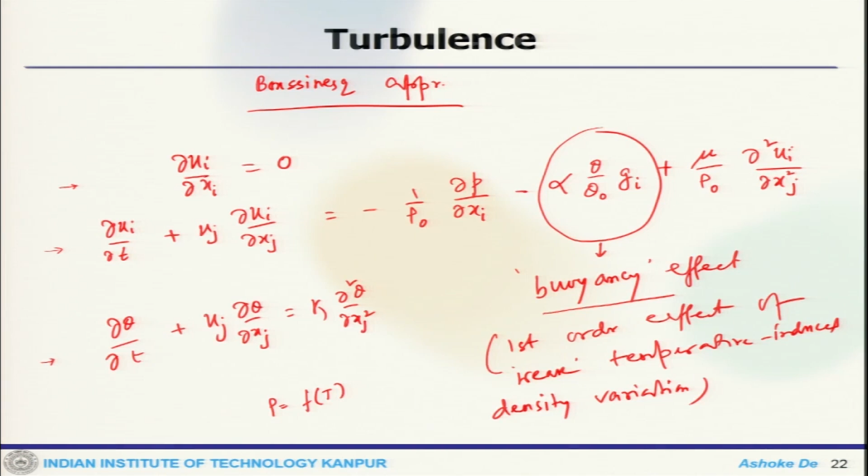Basically, when you have the Boussinesq approximation, you have the effect of the density variation, and the density variation is only a function of temperature. So, you got your continuity, momentum equation. Now, the momentum equation will retain a term which is due to the temperature, and this is my energy equation in terms of temperature. This term is known as the buoyancy effect. This is nothing but my first order effect of weak temperature induced density variation. Okay. So, that is what you get for the Boussinesq approximation.

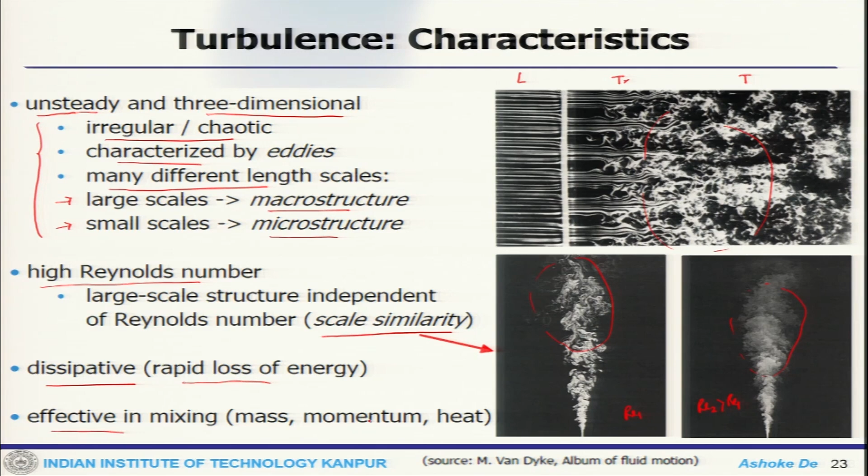Then also the flow field is at high Reynolds number. So, there is a scale similarity, that means the large scale structures are independent of Reynolds number. If you look at the large scale structure or the macrostructure, they are independent of the Reynolds number, and that gives you a scale similarity. This is a very important characteristic. Then the flow field is dissipative in nature. That means there is a rapid loss of energy, and it is effective in mixing of mass, momentum, heat, etc. So, these are the characteristics that we have seen.

Now, we have already said that for turbulent flow, the Navier-Stokes equations are ill-posed, because if we make some small perturbation to the initial condition or boundary condition, the flow does not remain stable any more. So, this is where we can use our concept of linear stability to see whether the flow is stable or not for some small perturbation, because this is quite important to identify the zone where you can see the stable flow field and the zone where it is unstable.

So, we can do some analysis for inviscid flows, that means no viscosity. One could be the type of Kelvin-Helmholtz instability; this is an image of unstable jet flow. So, this is an image of KH instability or Kelvin-Helmholtz instability. Then we can look at the Rayleigh stability equation for 1D basic flow and then the inflection point criterion for instability. Now, a similar exercise can be extended by including the viscosity. In that case, we will get the Orr-Sommerfeld equation and we can find out our stability diagram.

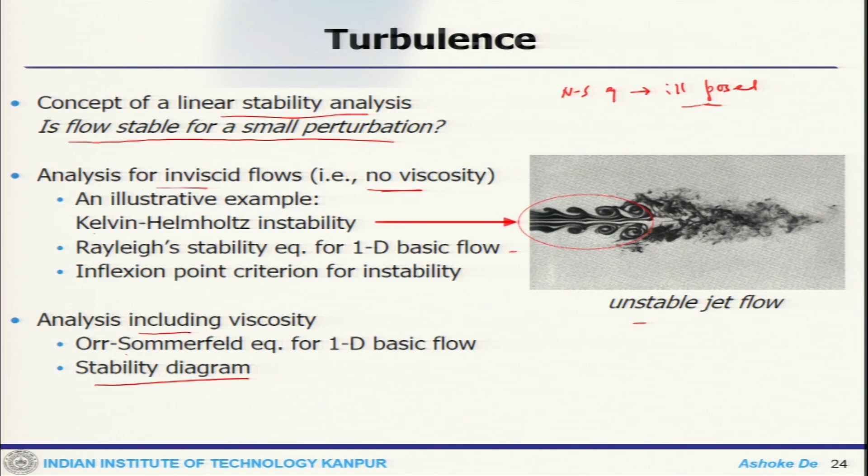So, the types of stability analysis one can do. If we start from the left bottom here, the analysis can go in one direction where it is nonlinear, which is something called finite amplitude disturbance. Or the other one is the segment where we can say it is linear, that means infinitesimal disturbance. Okay. Now, we will restrict our analysis to the linear system only. So, this one is not going to be discussed. We look at only the linear stability system.

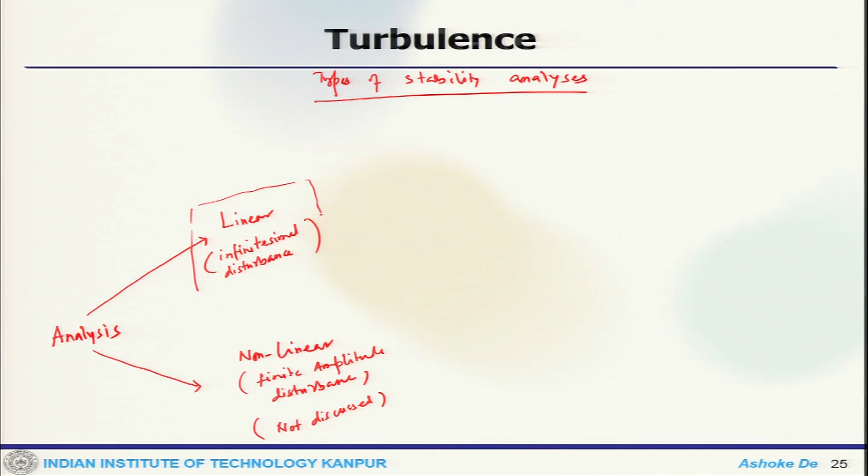Now, there are also different approaches to this. One can look at either normal mode analysis, which is no interaction between Fourier modes. So, that is normal mode analysis, or it could be non-normal mode analysis, that is mode interaction. So, even under the basket of linear stability analysis, we will only be doing the normal mode analysis. We will not treat the non-normal mode. So, not treated here.

Now, under the normal mode analysis, there could be two categories. So, we will say 1D basic flow, either it could be inviscid, which is essentially Rayleigh's equation, or we can do viscous, which is the Orr-Sommerfeld equation.

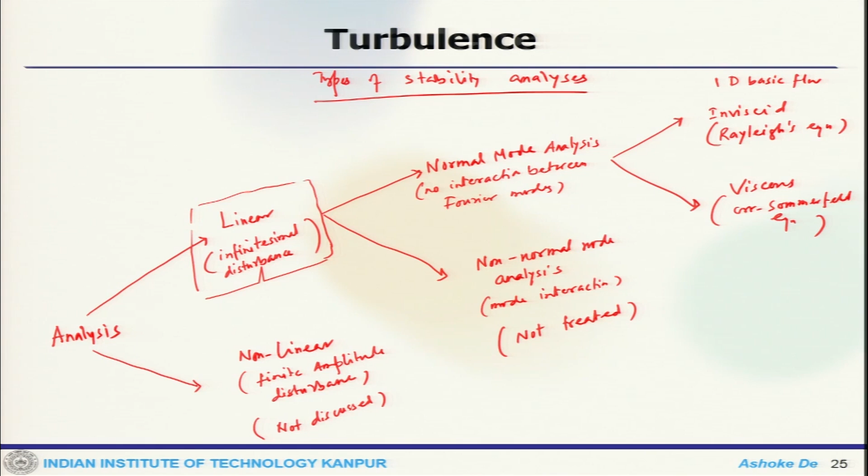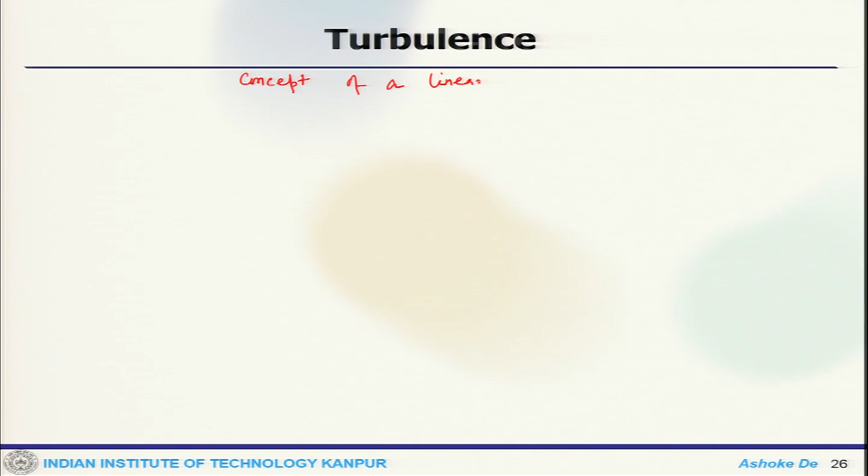So, we will look at these two types of instabilities. Now, before doing that, we can look at some of this concept of a linear stability analysis.

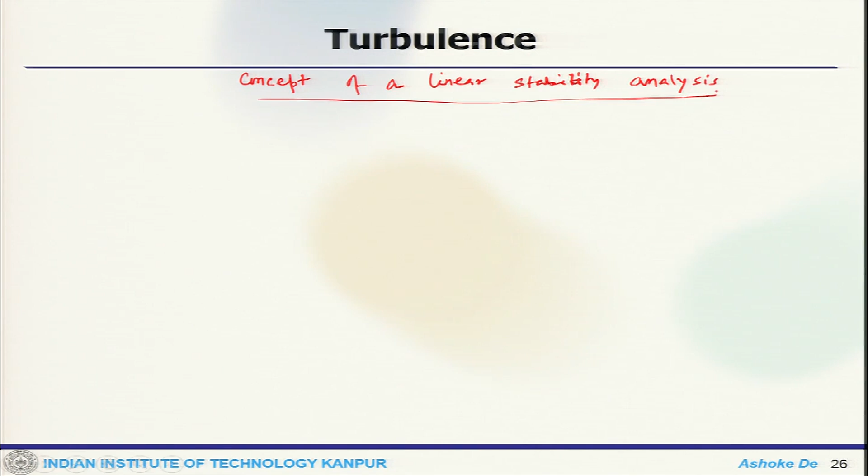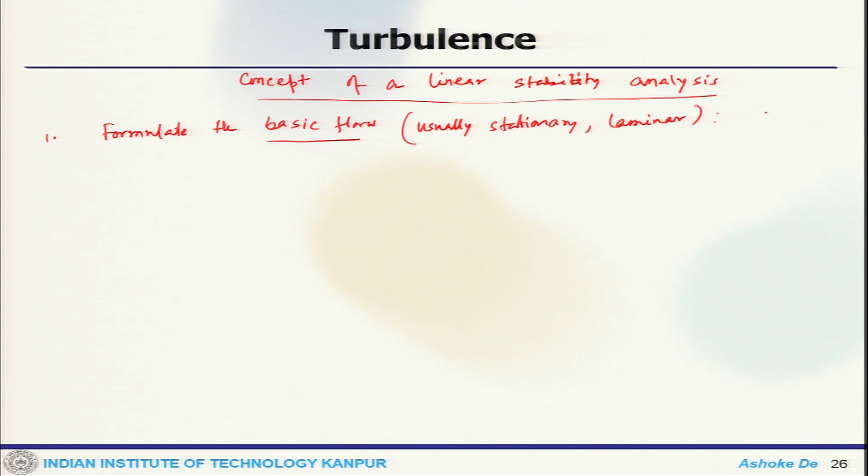So, the first thing that one has to do is formulate the base flow or basic flow, which is usually stationary and laminar. Then you can superimpose on this a small, non-stationary disturbance, that is u prime.

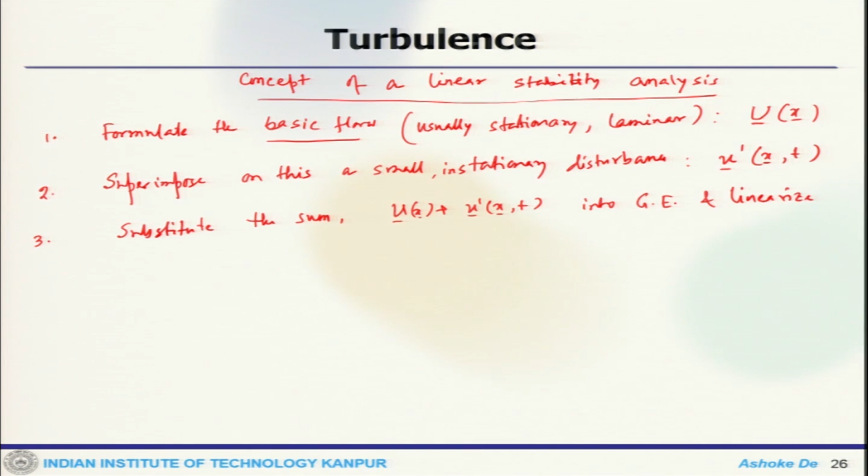Then you can substitute the sum, which is U plus u prime, into the governing equation and linearize, like del u prime by del t and so on. Finally, from that linearized equation one can formulate an eigenvalue problem.

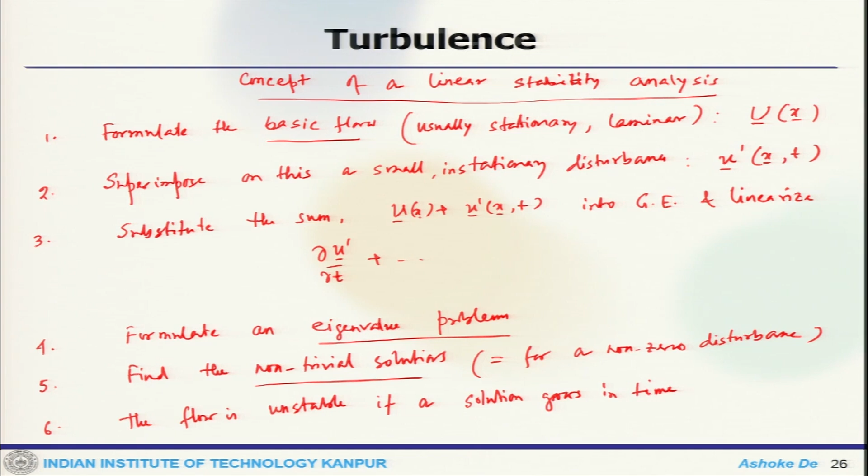So, this is quite important. Then we can find the non-trivial solutions, which is for a non-zero disturbance. And then finally, the flow is unstable if a solution grows in time. So, that is how we can do that.

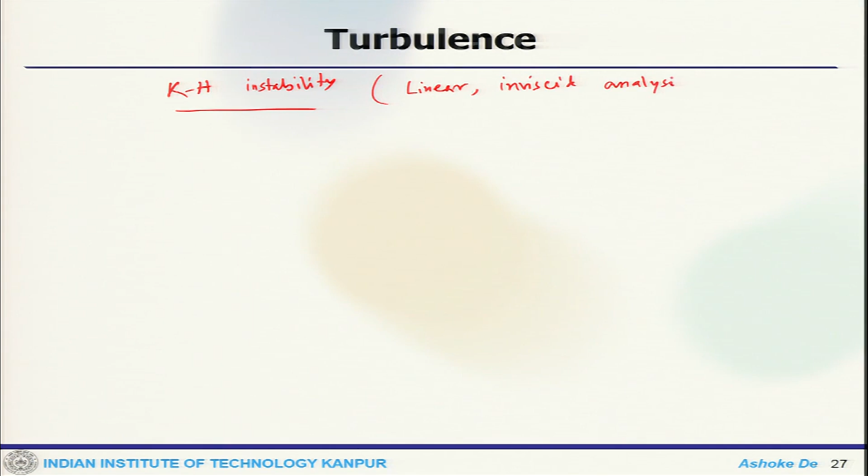So, we start with the Kelvin-Helmholtz instability, which is linear and inviscid analysis in nature. So, we can have a field like this, and this is lambda. So, this is my state 1, rho 1, u1. This is how I defined x and y. This is u2. This is my gravity g, and state 2, rho 2. This is eta x t.

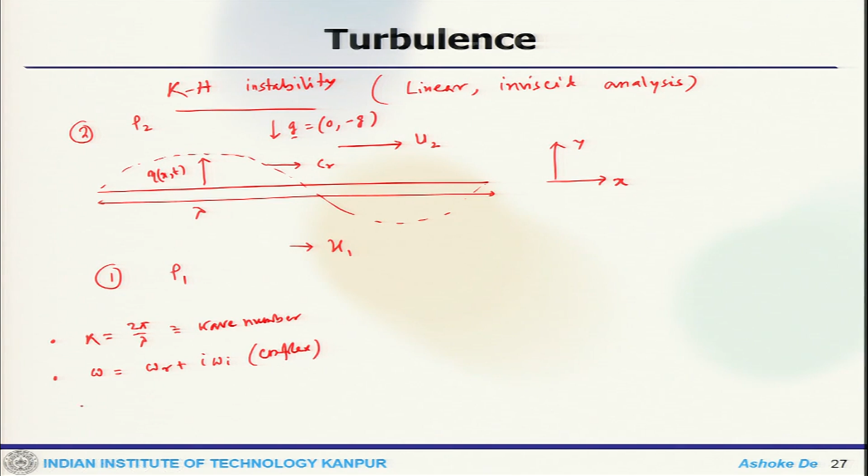This is my c r. Now, here are some definitions which are quite important to note. One is that k equals 2 pi by lambda, which is the wave number. Then we get omega, this is omega R plus i omega I, which is complex. Then this is my growth factor, and c R is omega R by k, which is lambda by T, the wave speed.

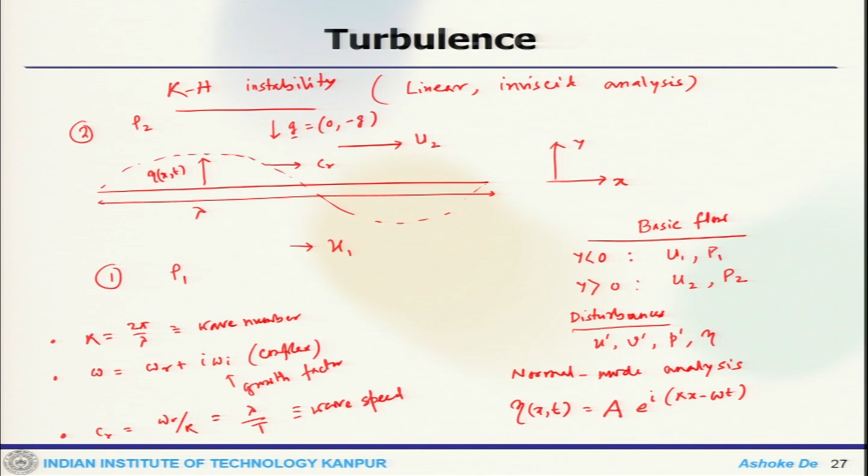Now, if you look at the base flow or the basic flow, for y less than 0, you have U1, P1, and for y greater than 0, U2, P2. Now, if you look at the disturbances, then they are u prime, v prime, p prime, eta. Now, for normal mode analysis, my eta x t is a e to the power i (kx minus omega t). So, this is the set of variables, and now we can derive the governing equation.

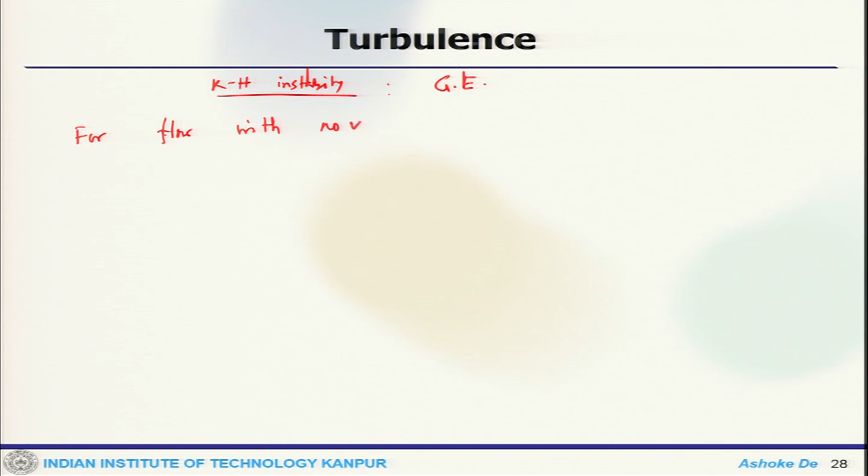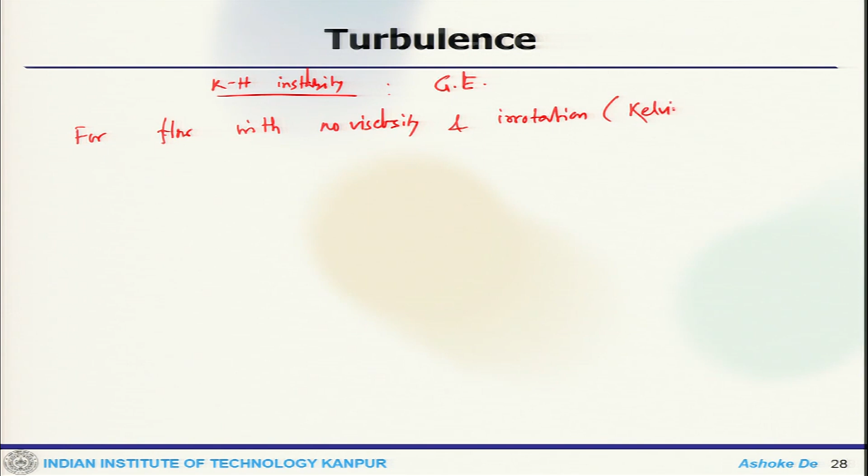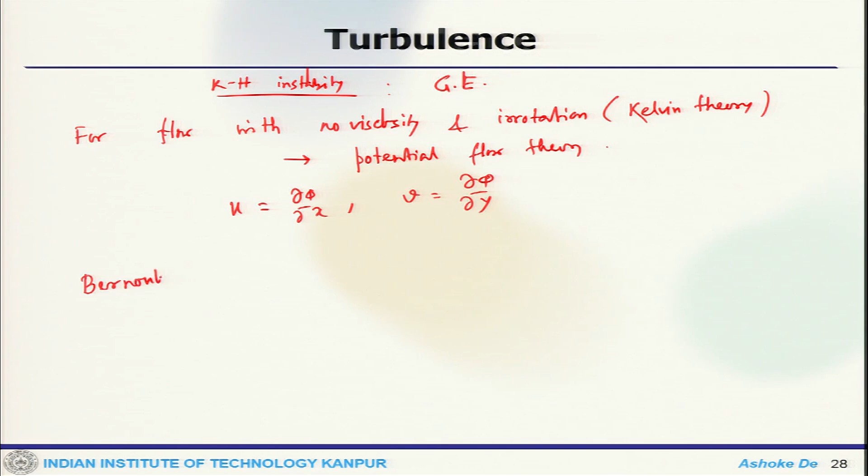So, here we are talking about Kelvin-Helmholtz instability. We derive the governing equation. Now, for flow with no viscosity and irrotational, which is Kelvin's theory, essentially it is a potential flow theory, which gives you u, v equal to del phi by del x, del phi by del y, and Bernoulli's equation will give you del 2 phi by del x2 plus del 2 phi by del y2 equals 0, and the other term, del phi by del t plus half of U squared plus P by rho plus g y equals 0. So, that is what we get.

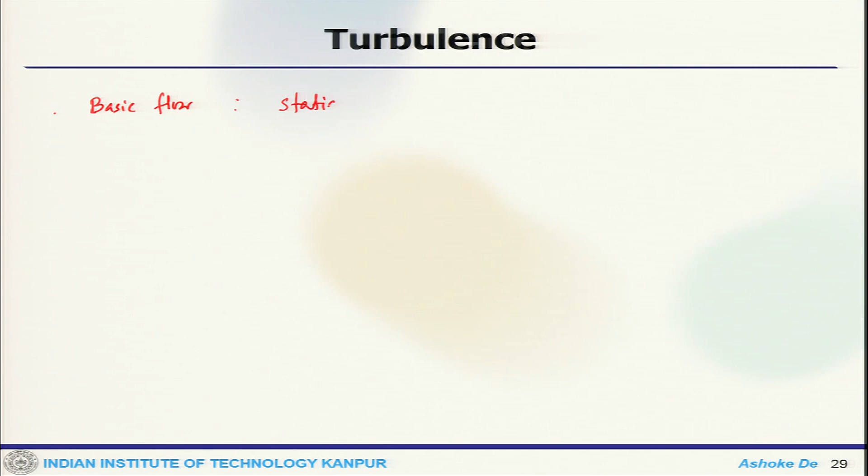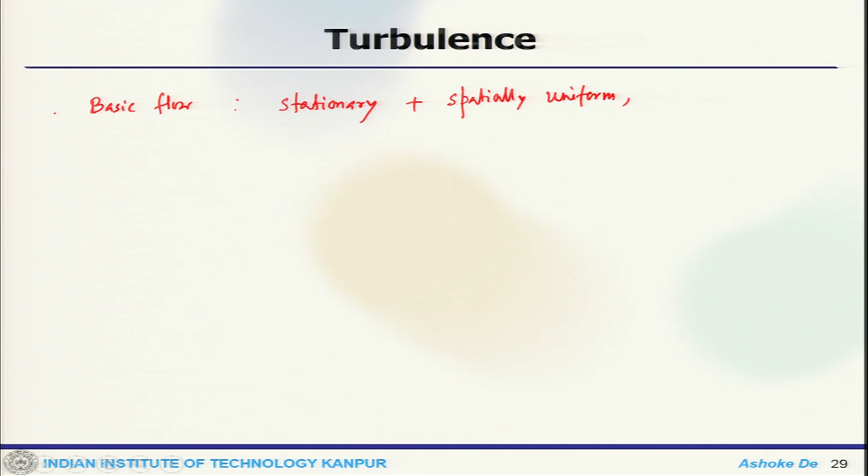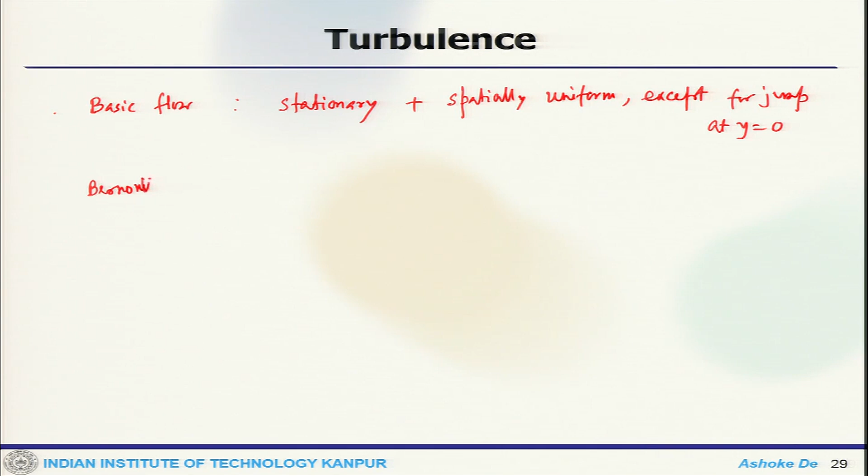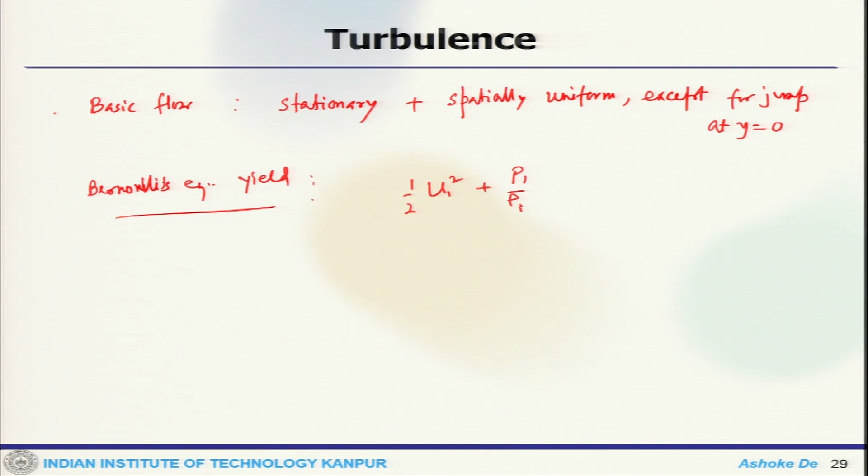So, what is our basic flow? It is stationary plus spatially uniform except for a jump at y equals 0. So, the Bernoulli's equation yields for this: half of u1 square plus p1 by rho 1 plus g y equals c1, and half of u2 square plus p2 by rho 2 plus g y equals c2. So, this is what we wrote. So, this is constant.

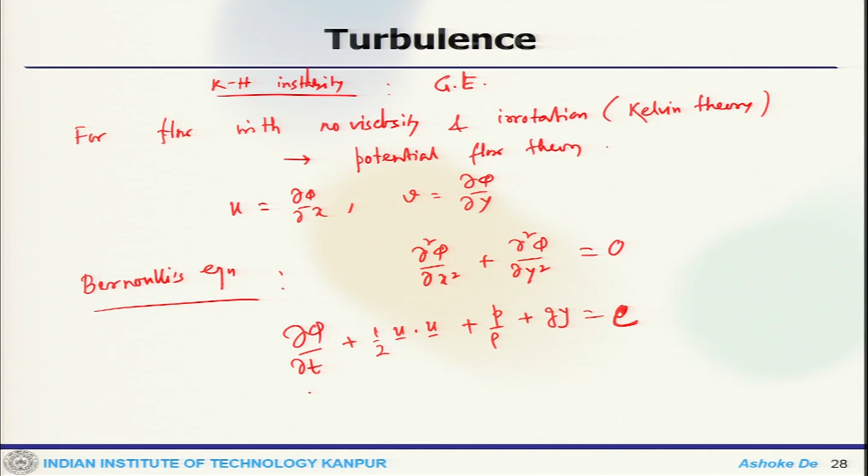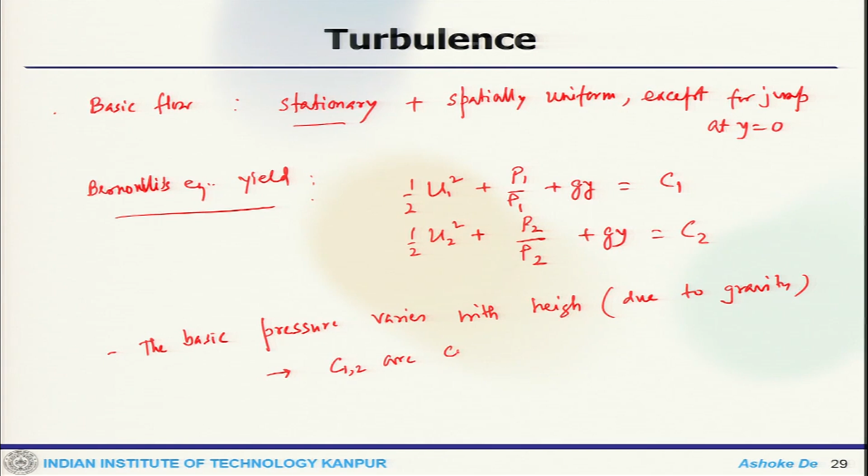So, then for stationary the unsteady term goes off, and the rest of the terms are spatially uniform except the point y equals 0. One can also note that the basic pressure varies with height, that is due to gravity, which means c1, c2 are constants.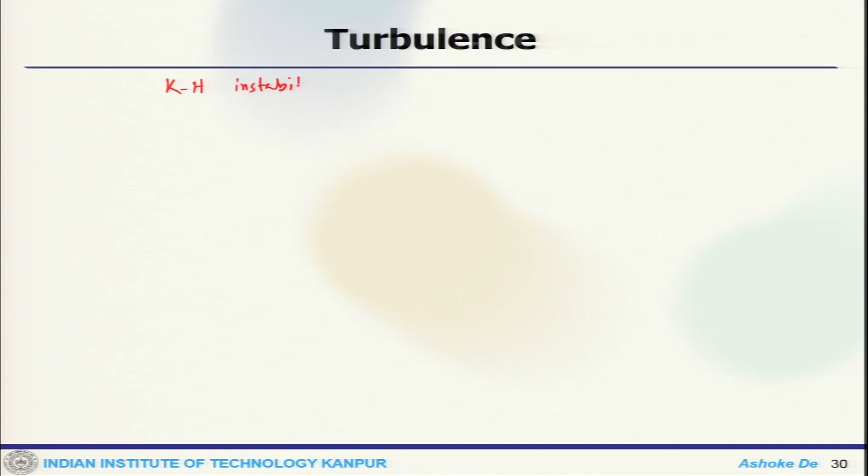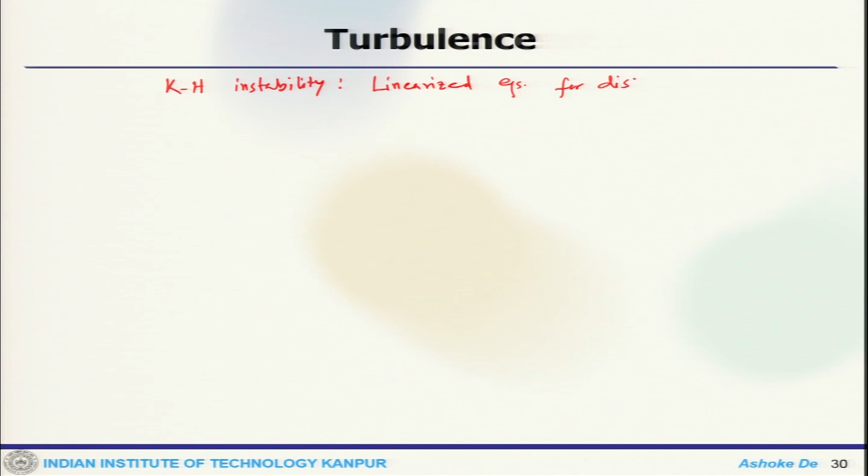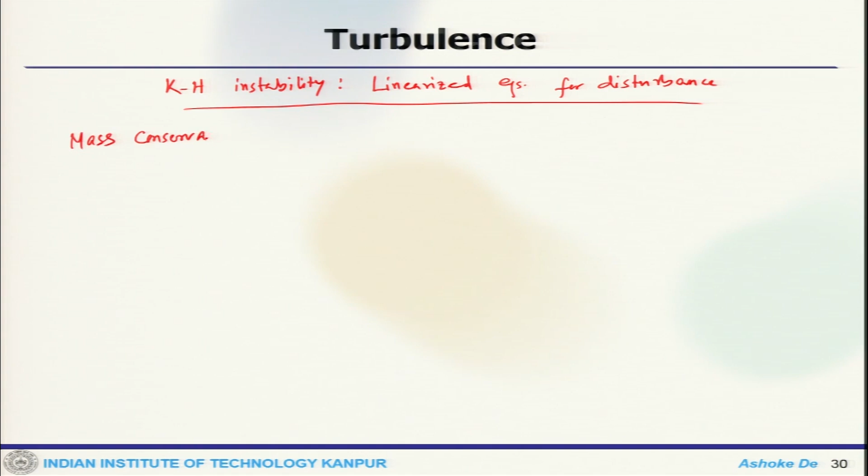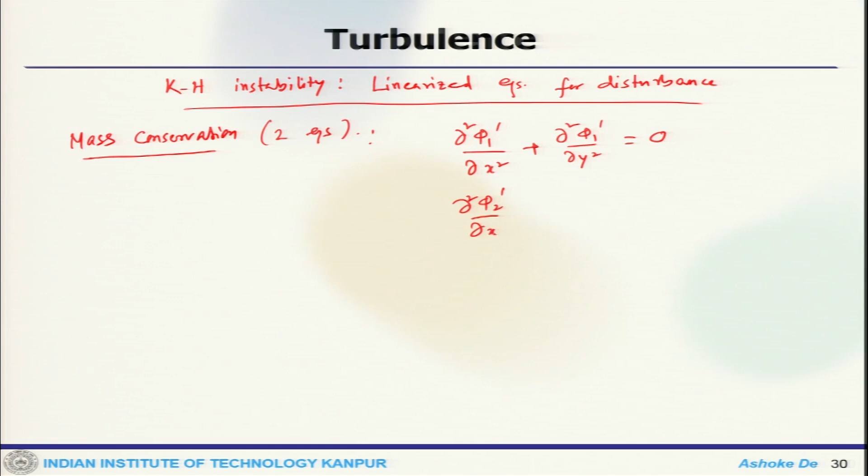Now, we can formulate the linearized equation for disturbance. So, still we are doing Kelvin-Helmholtz instability. This is the linearized equation for disturbance. So, from the mass conservation equation, we get two equations. One is del 2 phi 1 prime by del x 2 plus del 2 phi 1 prime by del y 2 equals 0. Second is del 2 phi 2 prime by del x 2 plus del 2 phi 2 prime by del y 2 equals 0. So, these are the two linearized equations that we get for the mass conservation.

Now, similarly, from momentum conservation we will get two equations. So, one is del phi 1 prime by del t plus u1 del phi 1 prime by del x plus p1 prime by rho 1 plus g eta is 0, and del phi 2 prime by del t plus u2 del phi 2 prime by del x plus p2 prime by rho 2 plus g eta equals 0. So, these are the two equations. So, from mass conservation there are two equations, from momentum conservation there are two equations, and they are linearized equations, and these equations are for disturbances.

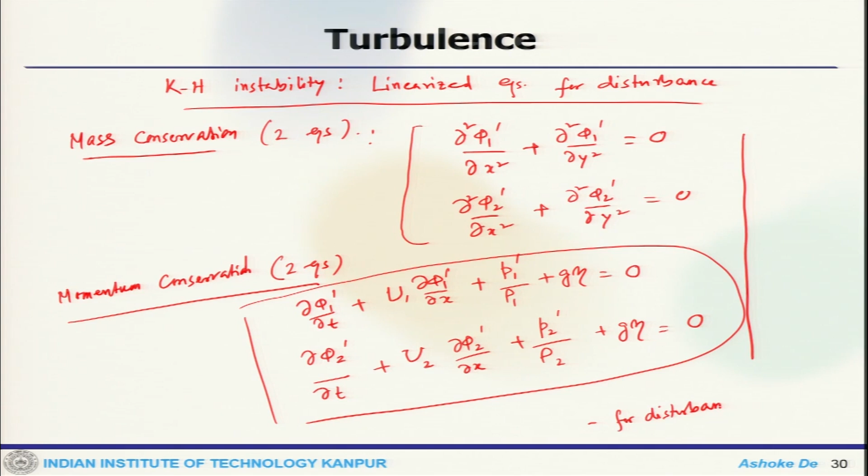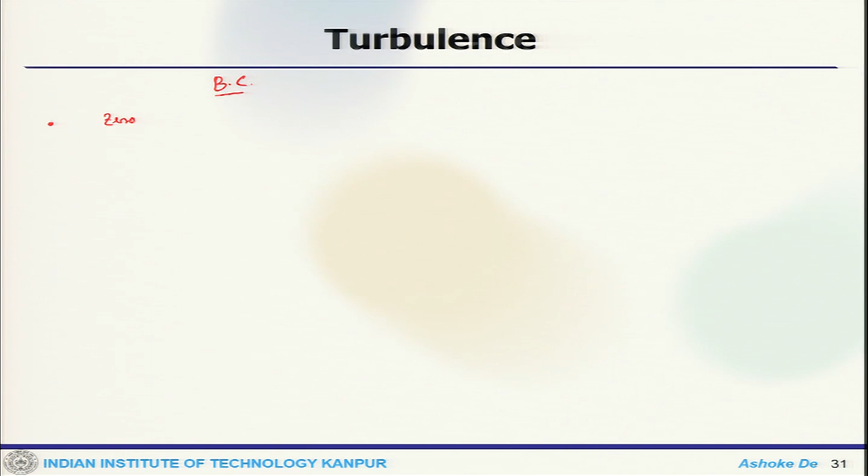Now, we need boundary conditions, which are quite important. Number one, we can have zero velocity disturbances far from the interface. That means one can write, limit y tends to plus minus infinity, del phi prime, 1 or 2, is 0. So, that is our zero velocity disturbance far from the interface.

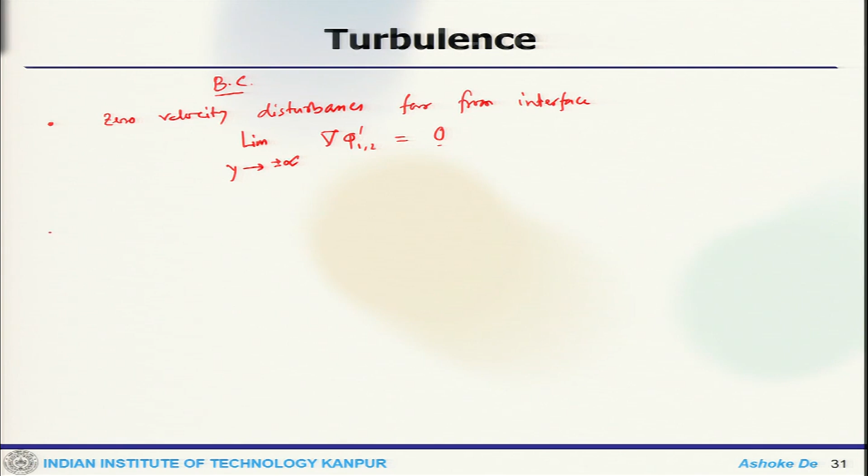Second, we can have the kinematic interface condition. So, the kinematic interface condition talks about fluid parcels sitting on the interface moving with the interface, and no gap should be formed between the two fluids, which means d eta by dt equals v at y equals eta, which is del phi by del y at y equals eta. So, that is my kinematic condition.

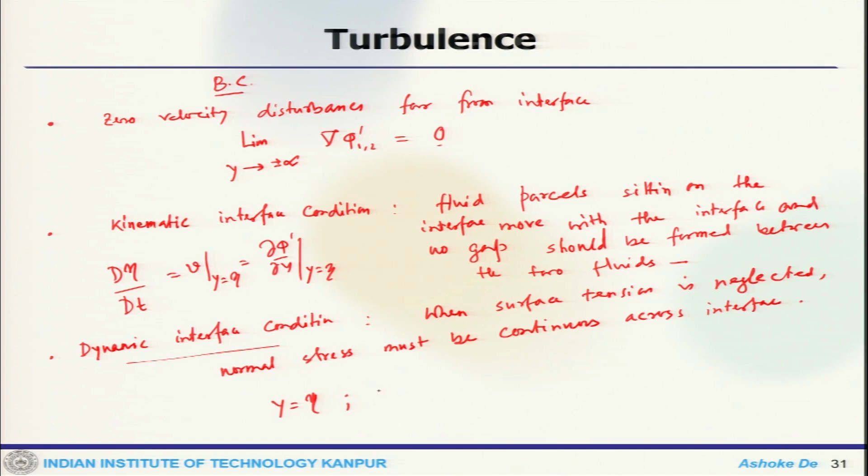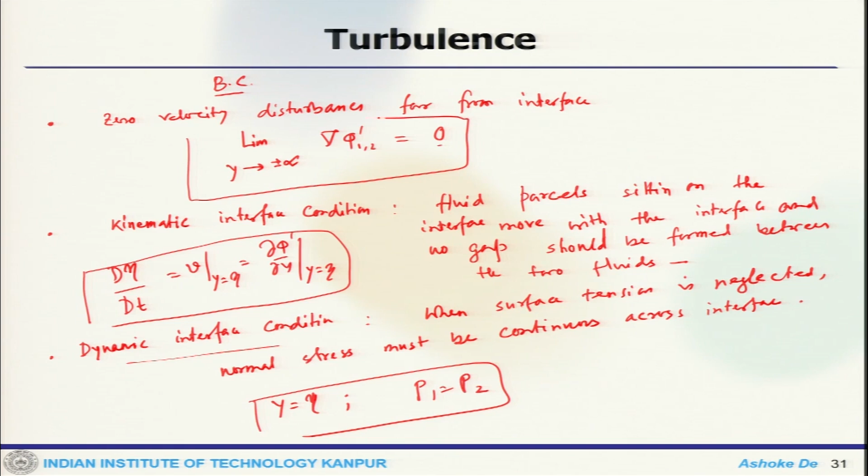And last is the dynamic interface condition. When surface tension is neglected, normal stress must be continuous across the interface. Now, for inviscid flows, a continuous normal stress reduces to a continuous pressure across the interface, which we get at y equals eta, P1 equals P2. So, these are the three conditions that one has as boundary conditions. So, we stop here today and continue in the next lecture.